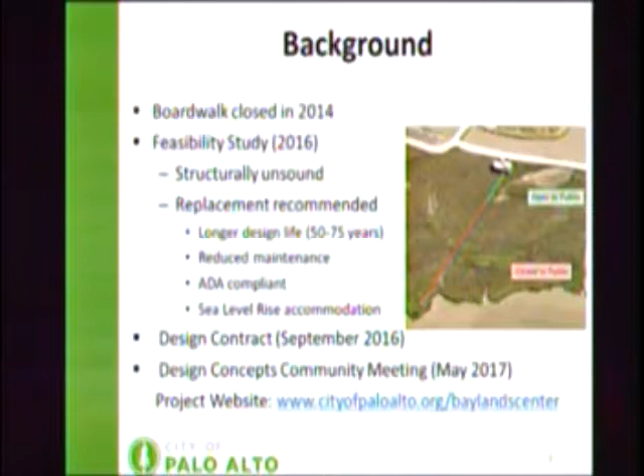We presented findings of the study to the Commission back in March 2016, and the Commission was in favor of replacement of the structure. A design contract was approved by Council with Biggs Cardosa in September 2016, and we developed initial design concepts and presented those in a community meeting in May this year.

The next slide shows an overview of the project. It includes all the project elements, which is essentially replacement of the existing boardwalk with a new boardwalk that follows the same alignment and has the same length. We will have some other components, including additional overlooks and an observation platform, new railing and decking, pylon supports, and some amenities. Tony is going to go over the details of the design.

So with that, I give it to Tony. Okay, so first slide, just talking about alignment, height, and width. We're going to replace it in the exact same alignment. The width of the structure, the existing structure, is 4 feet wide. We're going to widen it to 5 feet to better provide ADA access and passing lanes.

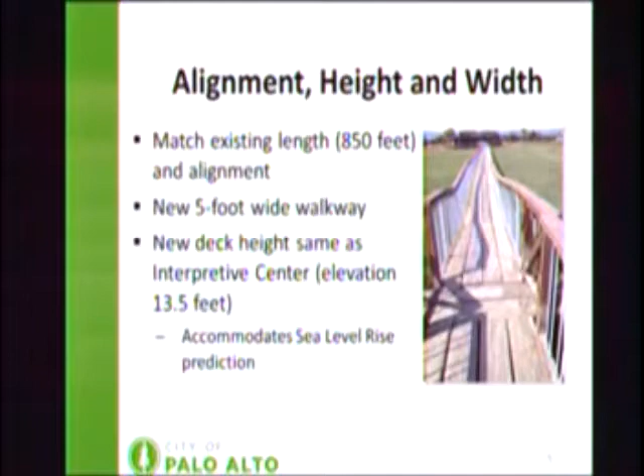One change since the previous presentation: the elevation of the deck has changed due to sea level rise conditions and our coordination with the BCDC and other regulatory agencies. They are interpreting the higher end of the curve, so they've raised our upper bound of where we can put the deck elevation, and we're proposing to match basically the deck elevation of the existing Nature Center at elevation 13.5.

How much of a change is that? That's about a 3-foot change, I think, from the existing 3.5. It's about elevation 10 now. Plus or minus, between 3.6 to 4.3 feet. The higher end is where the collapse of the existing boardwalk is, but the original constructed height was about elevation 9.9 or 10, so it's about 3.5 feet.

And the final overlook, or the viewing platform? At the end, we're just going to take it straight all the way out. Oh, that's unchanged? That would be unchanged, yeah. So instead of ramping down from the Nature Center out and then ramping up at the observation platform, you'd basically go straight out. Okay.

Another item that had changed since we previously presented: the original concept was to replace in-kind, with 2 overlooks and the observation platform out at the end. Per discussions internally with the public and with operations at the Nature Center, for seizing opportunities for more interaction with the Bayland site itself, we're proposing 4 overlooks strategically located to highlight different elements out on the site. Those can be seen on that one exhibit, showing where the 2 existing are and where the 4 are proposed.

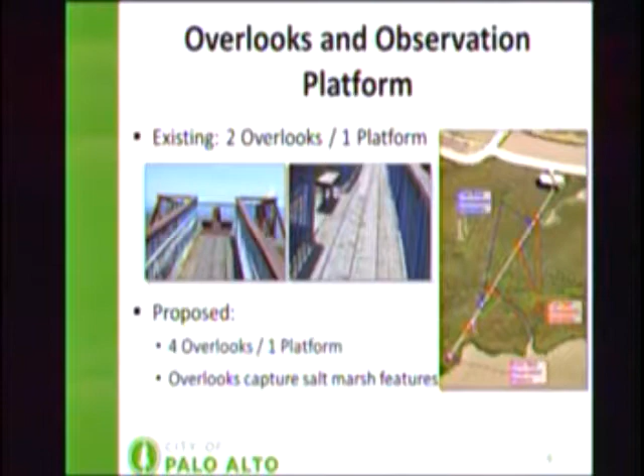The structure will have, we're proposing to use timber railing, similar in style to what was done on the interpretive center. The railings will be customized for use on the boardwalk. Since we have a very long linear structure with a lot of repetition, we're going to design the railings to be constructed in a panelized configuration, which will allow construction to proceed quicker, with less construction work on the site, and more work done off-site and carried on. The railings will be a minimum of 3.5 feet high to meet ADA criteria.

And then one element that we'll look for input from the commission on has to do with observation panels at the overlooks and the observation platform, to allow viewing through the railing. We have, on the interpretive center, glass panels there.

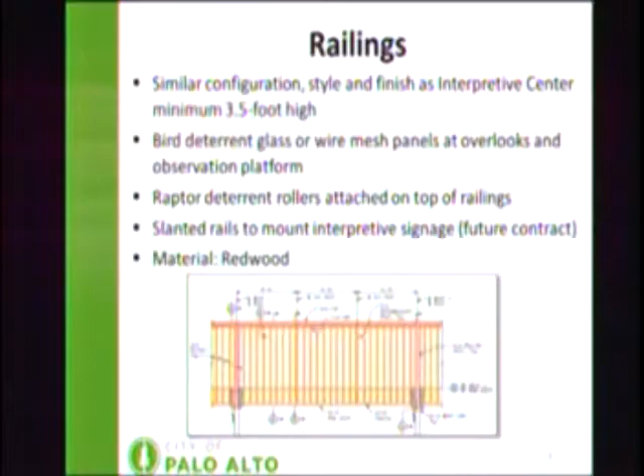For the boardwalk itself, in consultation with the biologists, we've shrunk the size of those openings to be a little smaller, less likely to cause a bird strike farther out where the birds are more active. We have two alternatives to look at: one's a glass panel like on the interpretive center, and there's also been some discussion about using a wire mesh panel.

Another change since we last spoke, which came out of our consultation with the biologists and coordination with the regulatory agencies, is a concern about the higher boardwalk elevation allowing raptors to perch on the higher railing, giving them an opportunity to hunt mice out there. So it's been proposed to put in what we're calling raptor deterrent rollers.

They're basically a roller system. If a bird lands on it, it rolls so they can't just sit and perch. There's a similar system in place at Alviso Park, and there's a photo up there of that system. Basically it's just a roller that sits along the top rail that would discourage raptors from perching there.

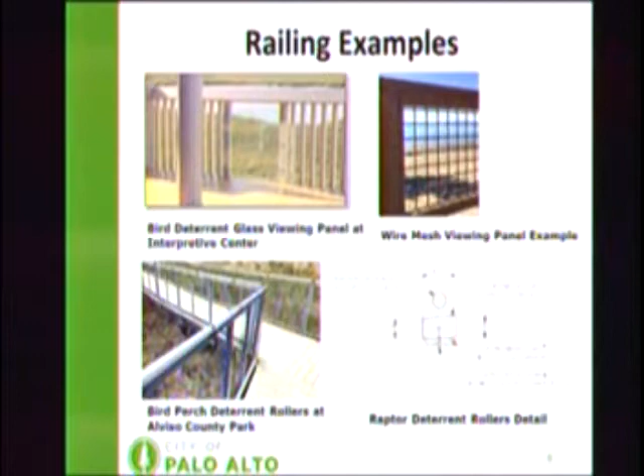Another key feature is the decking of the boardwalk. The existing boardwalk has longitudinal planks, with the boards running parallel to the direction of travel. The project proposes to use a transverse decking system, which is very common on many of the prefab bridge structures along the trails. The advantage is we get to use a smaller member because you have a shorter span, which helps with costs and with maintenance costs down the road, since you'd be replacing smaller elements. All of the decking elements we're looking at using redwood, similar to what was used for the interpretive center.

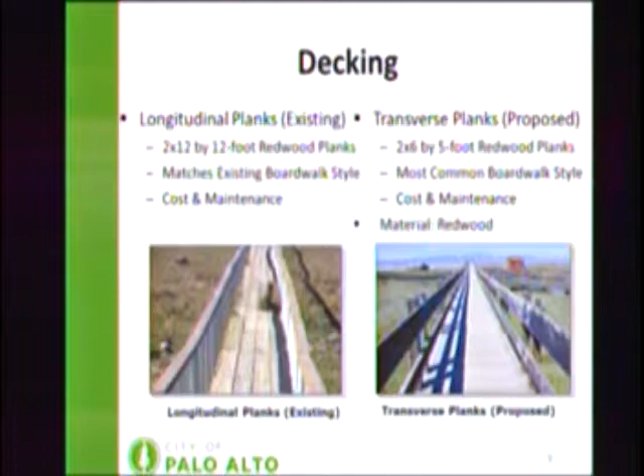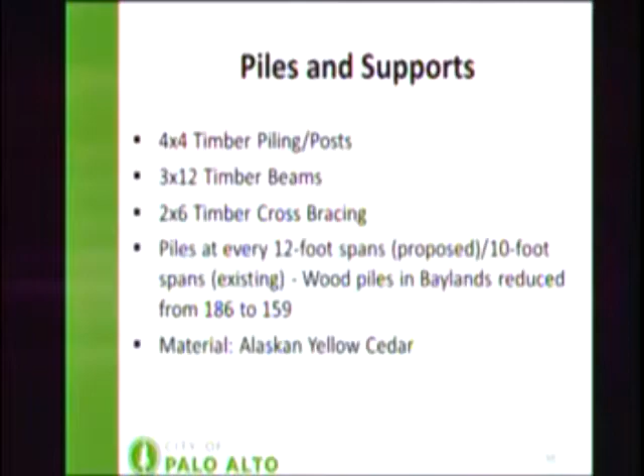The main structural elements consist of, very similar to the existing, timber posts or piling that go down into the bay muds of the marsh. They'll be capped with timber beams, and then we'll provide timber cross bracing to provide lateral stability to the system. Then there'll be longitudinal stringers that support the deck elements. All of these primary structural elements, we're proposing to use Alaskan yellow cedar, which is a natural, durable softwood, mostly coming from Alaska and areas in Canada.

That's an alternative to pressure-treated Doug fir, which the regulatory agencies have been strongly discouraging to avoid chemicals getting into the wetlands. That was a material already used on other projects and approved by them, and it was recommended by the Water Board for this project.

One of the options before was metal screws. When the structure got higher, the metal screws were no longer cost effective because they're very flexible, and the higher we got, the more sway you'd get out of the system. So we would have had to increase the number of elements in shorter spans, which is why we moved away from that.

As for what lifetime we expect for these posts, we're looking at 50 to 75 years as the target, in the mud. The Alaskan yellow cedar is a fairly durable material used in marine environments with salt water, and it's also resistant to marine borers, so it has good natural properties.

This graphic shows visually what the cross-section of the boardwalk would be. The elements in yellow-brown are the Alaskan yellow cedar, the primary structural elements below. Your walking surface, decking, and railing would use heart redwood, similar to what was used at the interpretive center.

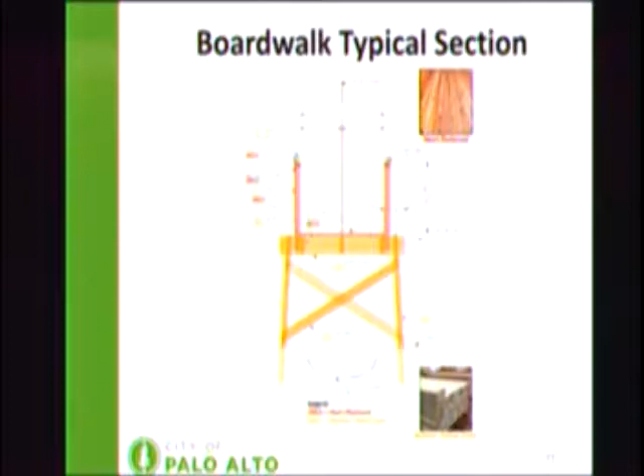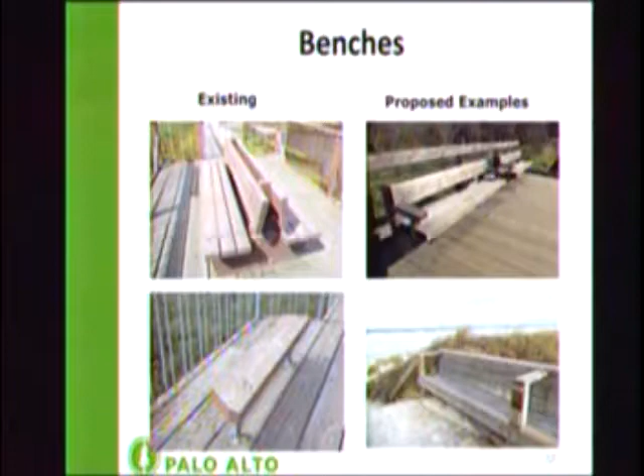In accordance with the site assessment and design guidelines for Palo Alto Baylands Nature Preserve, all the wood would be stained with a natural gray product from Olympic, and any metal fasteners and components would be painted Sandy Hook gray from Benjamin Moore, exactly as was done at the Nature Center.

With the follow-on project, there's an opportunity for interpretive signage to be incorporated into the project at the overlooks and the observation platform. Our design will accommodate some slanted railing that will incorporate the signage in the future, and we'll also design the elements to facilitate attachment of different interpretive features being developed separately by the city.

And the last thing for me, just a reminder of some of our key construction constraints that we're dealing with environmentally. Because of the Ridgway's Rail out there, we have a work window from September 1st to January 31st to stay out of their breeding season. So that's one of our key constraints.

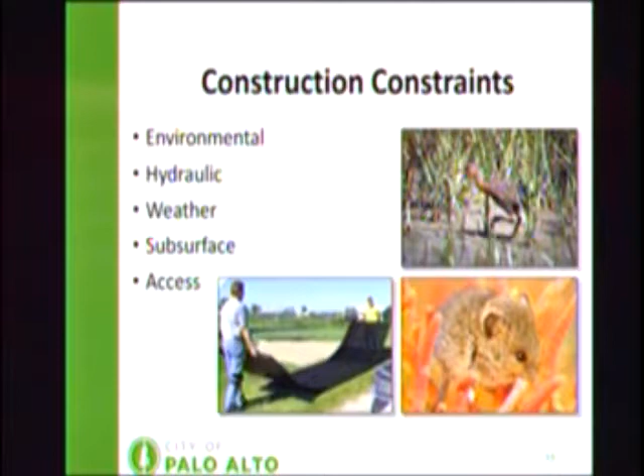Hydraulically, during that time period, we can expect a high tide usually once or more a month. So we're going to have to accommodate some flooding during the course of the project and some loss of work days. The construction window is in the rainy season, so we've factored in some rain days for our construction estimate.

Subsurface conditions, we're in a marsh with very weak soils, so that's accommodated in the design of the supports, as well as we don't really have a good ability to work from the marsh deck level itself. So we've proposed and designed the elements to be small enough to be constructed with small equipment from the boardwalk itself. The contractor, we would expect, may have to do some localized strengthening to support his operations of the existing structure before he removes it.

But the plan is to work from the existing boardwalk. The only caveat to that is access out to there. Instead of going through the nice newly renovated nature center, we need to come around the outside with a series of marsh mats on the marsh level to get access for the contractor on a daily basis.

And with that, I think Megha will take over schedule and next steps. Yeah, so regarding schedule, we have completed the preliminary design of the project, and we are currently preparing the CEQA document.

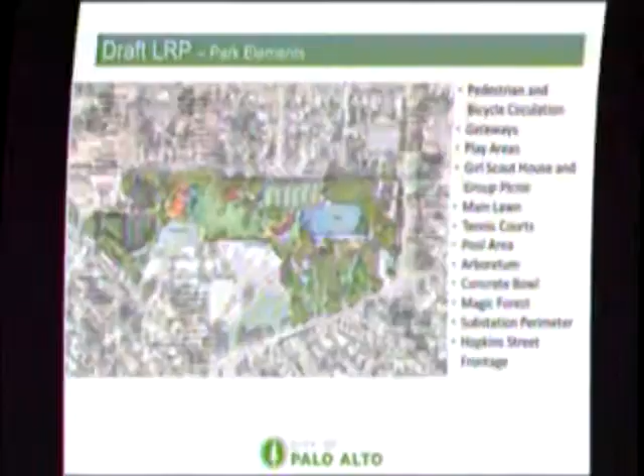The actual park, and how it's broken down into its pieces in the long-range plan, is known as the park elements. Those park elements that were really reviewed were the pedestrian and bicycle circulation, the gateways into the park, the playground areas, the area around the Girl Scout house, which is the location of the only group picnic area in Rinconada Park, the main lawn area, the tennis courts, the pool area, the part that runs along the street frontage along Embarcadero known as the Arboretum, because of the existing mature trees there, including a historic or heritage oak tree, number 2 for the city of Palo Alto, which is over a 200-year-old oak tree.

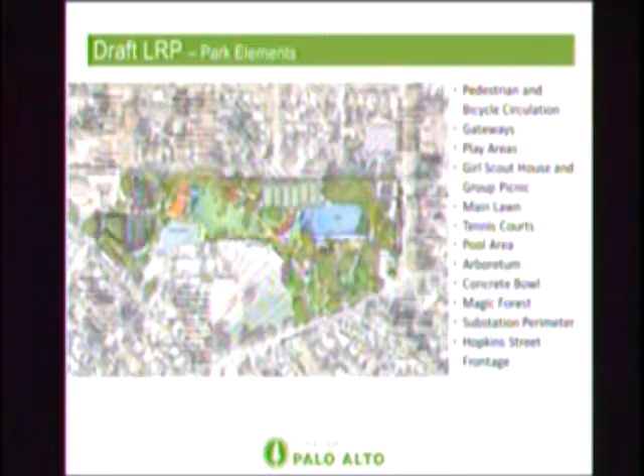The concrete bowl, the magic forest, the substation perimeter, and then the Hopkins street frontage. So if you had an opportunity to take a look at the long-range plan report, it broke down the park into these elements, and then discussed the recommendations for future either maintaining or improving those spaces.

It was very important - we looked at two different designs for the main pathway in the process of the master plan's development. One followed and went more towards the Hopkins side. It was felt by the commission, staff, and the community that the more direct link through the middle of the park, very similar to what it is now, would be the way to maintain that.

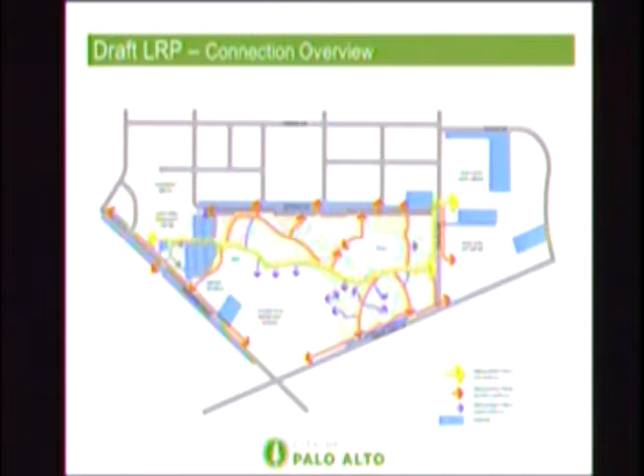It's interesting to note, as you've seen with the parks master plan process, this is a long range plan similar to that, though put together a few years ago. Over time things change and evolve, so the parking lot design shown in the plans isn't basically what's being proposed today—it's been tweaked due to the more intense design process for the Junior Museum and Zoo. So the plan's recommendations are something we can revisit over time. I think the majority are very good recommendations that don't impact the park much but add needed amenities. Like the master plan itself, this is an evolving document, not totally set in stone.

I'm going to go through about four slides here. Each one represents a different aspect of the recommendations for the park. This one covers existing park elements to be enhanced—things that currently exist in the park now, and the recommendations for how we can improve them slightly.

The first one is the open turf area. Basically that's about maintaining that space as it is now—it's a very important area of the park, used for large group gatherings. We'd like to maintain that, and improve the irrigation and drainage of the site to make it more usable and more sustainable.

The children's playground to the west, right behind the Girl Scout house, will remain in that location, with continued equipment upgrades and ADA upgrades as we do with playgrounds over time.

The multi-use concrete bowl will maintain its current form, adding some amenities like power, so it can be used more as a performance space—an opportunity it doesn't have now.

The arboretum area recommendation is to address removing the turf in those spaces to help mostly the existing oak trees that are there.

The tennis courts would see a slight shift to allow for a pathway—we'll talk about that pathway later. If you've walked through Rinconada Park, in that location you have to circumvent the well site and go through the magical forest to get to the pool, and that seems to be a popular path. We'd like to make that an actual real path that addresses some safety and access concerns at that point.

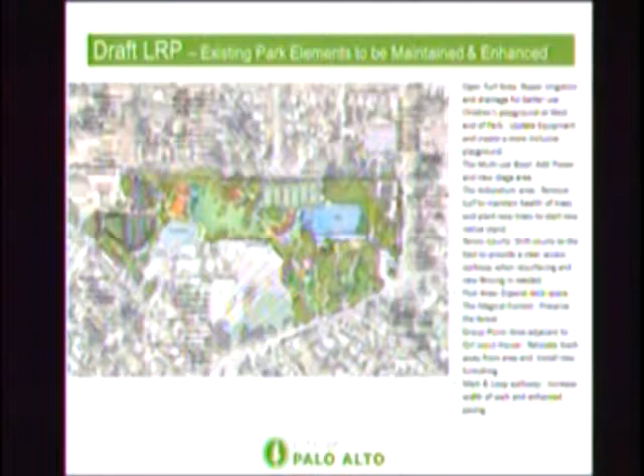The pool area itself would be maintained with an expanded deck. The long-range plan doesn't delve into a recommendation of expanding the pool itself—I think we all realize that's an option for the future if decided. What the long-range plan does do is expand the pool deck around the pool to provide the opportunity to have a full-size 50-meter pool installed there. So when we talk about implementation over the long range, we can discuss when we're planning to do that, and of course the cost of doing so.

The group picnic area adjacent to the Girl Scout house will remain, just enhanced with new tables and a new trash receptacle area to remove the dumpsters from that area.

The Girl Scout house location would remain the same, with some added amenities. We're proposing to add some type of fire pit area that would replicate the Boy Scout house fire pit area, to provide the same basic amenities to the Girl Scout house.

The main loop walkway would be maintained. We've heard from a lot of community members that the pathway around the main turf area is used for exercise, so we want to maintain that circular pathway and even have the opportunity to increase its distance.

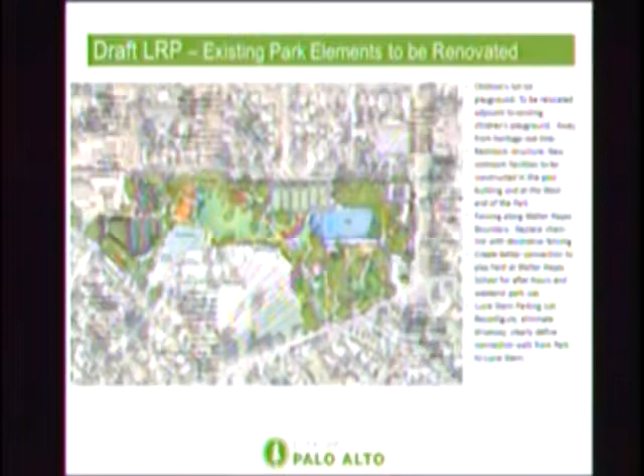These next items are existing elements in the park to be impacted more by improvements or renovations, including the children's tot lot. Currently that tot lot is closer to the tennis courts under an existing heritage oak tree—not the greatest location given the compaction and hard play happening under it. The plan proposes relocating that tot lot closer to the Girl Scout house, combining it with the existing children's playground there. The other reason for doing that is it allows caregivers the opportunity for their kids to play in one location without having to watch two separate areas.

Providing a new restroom structure. The current one in the middle of the park, we'd like to remove because it blocks a key view straight through the park connecting all the elements. That would be done by adding a new restroom facility onto the pool building. We'd have to have a new restroom structure anyway to meet current ADA standards, so moving that out of the line of sight would be beneficial.

The fencing around Walter Hayes School, enhancing that somewhat. Right now it's chain link and it takes up quite a bit of view out there, and it's not the most pleasant, so that could definitely be addressed.

Creating a better connection to the rear of Walter Hayes School. We heard a lot from the community that students from Walter Hayes come in through the backside, through the park, and there's not really a direct path to get to that gate, so we looked at doing that as well. And then the reconfiguration of the Lucy Stern Rinconada parking lot, which right now is hard to figure out and drive through—looking at renovating that to make it a better and safer experience.

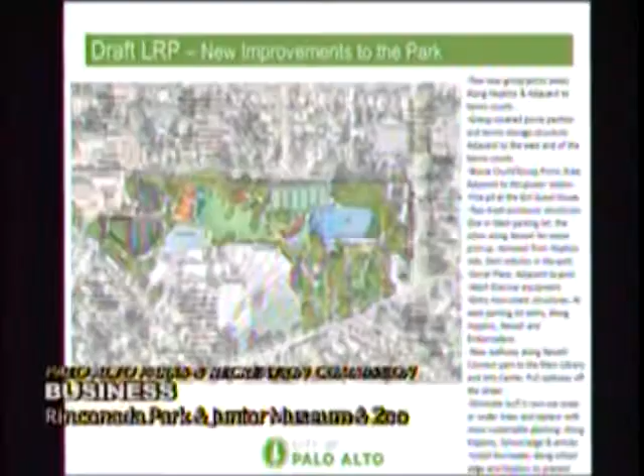This next slide discusses new improvements to the park that don't exist there now. That would be the addition of 2 new group picnic areas. As I mentioned before, Rinconada Park only has 1 designated group picnic area now. There's demand for more group picnic areas, so one location is behind the tennis courts, where there are picnic tables now—this would just be a more organized and larger group picnic area.

And then out along Hopkins on the west side of the tennis courts, that picnic area development is proposed, in the long-range plan, to have a covered picnic shelter. The Tennis Association has shown interest in developing and helping fund that structure. The local tennis group uses Rinconada as their main facility—they hold tournaments out there, and they don't really have a check-in or a place for their committee to meet. So along with funding that, they requested the structure have a room for storage and meetings, plus an outdoor area larger groups can use, which could also be used by the community when not needed for picnic purposes.

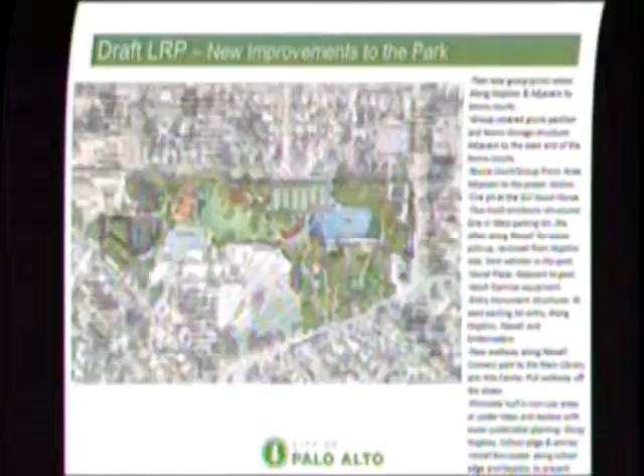The next one calls out for bocce courts. Where would this new building be? It's right next to the tennis courts, right here. That's where the tot lot is right now. The tot lot is more underneath the oak tree, but yes, right adjacent to it, basically.

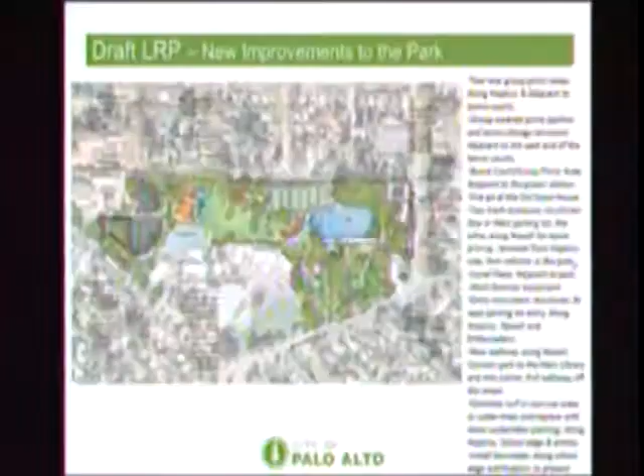The bocce courts and the group picnic area are in the area between the pool and the power substation. The plan recommends activating that area and providing some type of usable activity in that space. Bocce is an option—I think when we get closer to developing that space, and when it's on the books as a CIP project, we'll have further discussions about what that space is actually going to be developed as.

We want to add 2 trash enclosures. If you've been through the park, you'll see the dumpsters are just kind of scattered around. We want to make a specific, more concealed place for them, where trucks coming to pick them up can more easily access than where they are now.

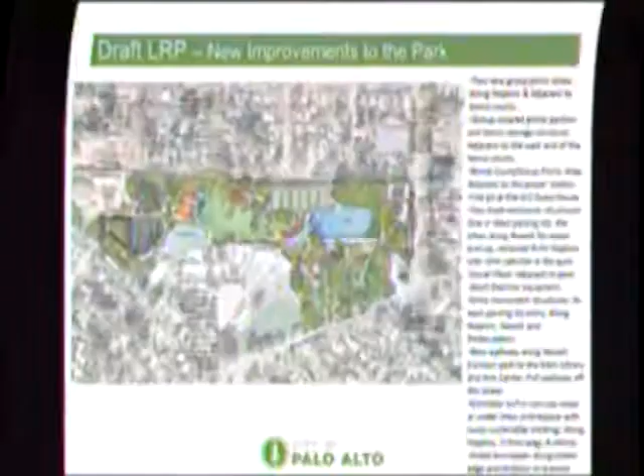Developing a better plaza outside the pool area, providing adult exercise equipment in the park associated with the playgrounds, and providing entry monuments at the entries—mostly at the entry from the Rinconada parking lot, and from the Newell Street entry. The idea is to use art or some type of structure or architecture there to highlight those main entries, so from the parking lot or from across the street at the library and art center on the Newell side, you would clearly see the entryway to the main pathway leading through the park.

Developing a new walkway along Newell, along the power substation. Currently along Newell there's a row of redwood trees planted underneath the high voltage lines. They are continuously topped every few years because they can't grow into the high voltage lines. Unfortunately, the redwood tree is known for its height and columnar form, but that's not the case anymore—that continuous cutting will eventually lead to the tree's demise.

So what we would like to do there is actually remove the redwood trees from that location, pull the walkway off the back of the curb and get it more towards the middle of the space, have it more meandering, much more of a nicer pedestrian walk that's leading you from the corner to the main walkway, and then replacing the tree planting with a more appropriate size of power line-native trees.

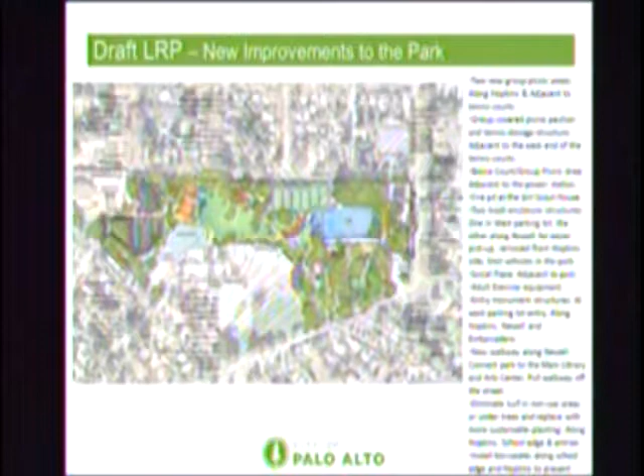So where are those trees on the map? That area would be right along here, right along Newell. Basically, if you're standing at the Art Center Library and looking right here, you're looking right at that row of trees there.

And of course, for sustainability purposes, we'd like to address removing some of the turf area that's out there, especially in spaces where it's not really usable on the edges, and also capturing and filtering stormwater on site. We have an opportunity to do that as well.

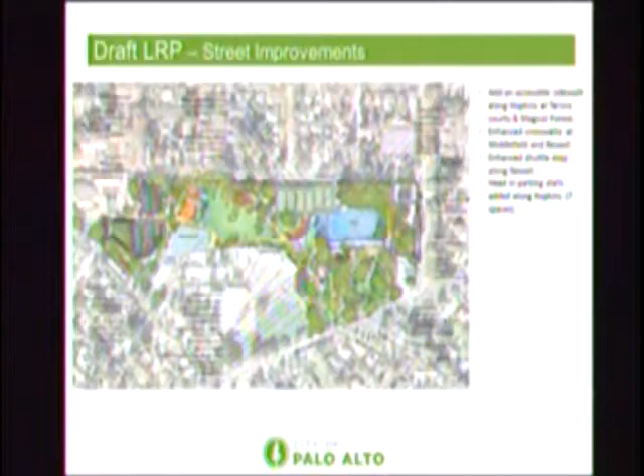The last slide for improvements here are the recommended street improvements around Rinconada Park. Most of these have actually already started to occur. We started to do this back in 2012 and 2013. You'll see a project right now going on Middlefield at the Lucy Stern Center that's adding an enhanced crosswalk there. That was one of the recommendations of the long-range plan. A few years ago, an enhanced crosswalk was installed on Newell between the Art Center and the park itself.

We'd like to also add an enhanced shuttle stop along Newell. There's one there now, it's just basically a park bench, but we talked about covering it or making it more special somehow in that location.

And if you've been to the park, there's head-in parking that runs along Hopkins. There is a location now, towards the west if you move towards Lucy Stern, where that parking could be expanded to give a few more parking spaces that would help address some of the tennis and pool users, giving them a little more flexibility to use those facilities.

The next few slides show the ideas behind implementation. The long-range plan itself is set up to be developed over a 25-year period. That's mostly based on economics and getting all the money necessary to renovate the park. You're basically looking at doing a project there every 3 to 5 years to fulfill the long-range plan.

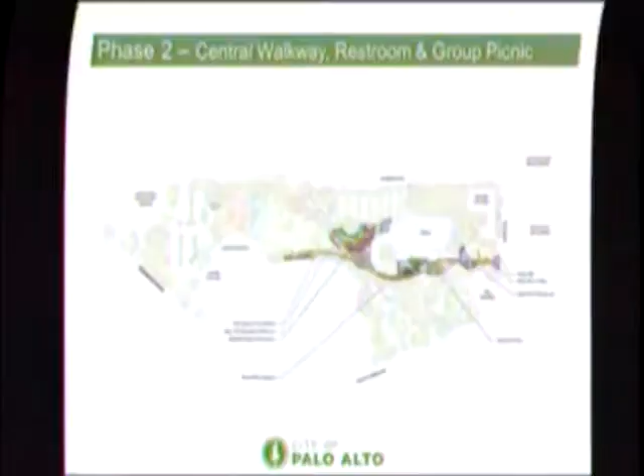Then we'd like to finish enhancing the pathway that runs through the park itself, since that is one of the main objectives of the long-range plan. That would focus on phase 2, which would look at the development of the space in front of the pool, as well as the development of the second group picnic area.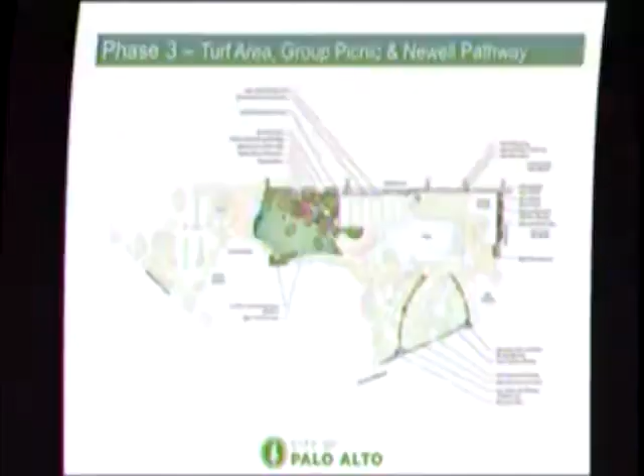Completing the connection of the walkway along Hopkins, that I guess is a two-phase thing. Currently, there is no sidewalk along the Magical Forest section, which is this section right here. It has a decomposed granite pathway. We'd like to connect the concrete path from there to there, so it's continuous.

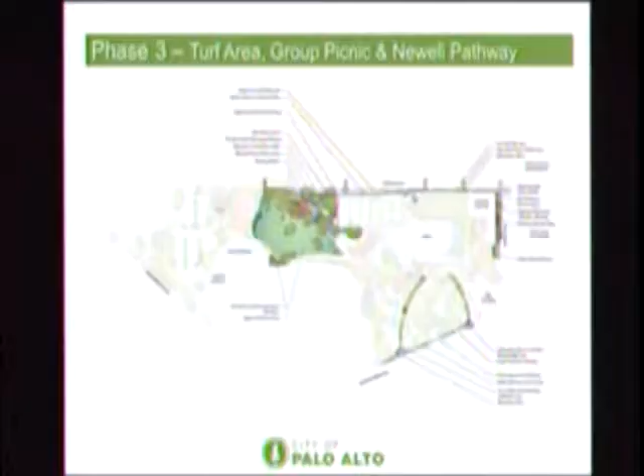There also is not a concrete path between the parking area and the tennis courts. There is ample room though to create a walkway there, so we'd like to continue the walkway in front of the tennis courts as well, hooking up to the sidewalk on the other side to enhance that whole edge and the connection to it.

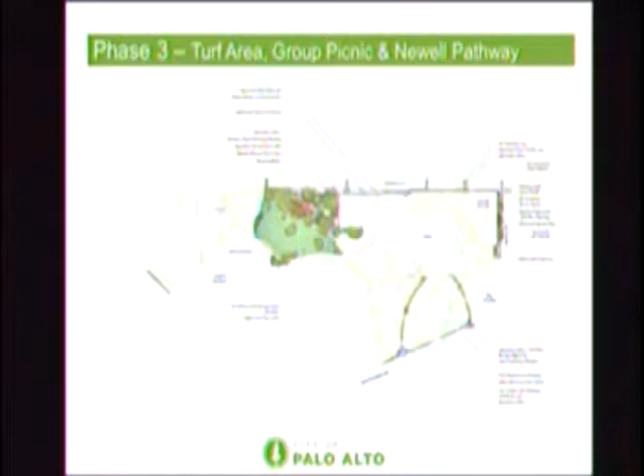It also looks at pathway improvements to the Arboretum and upgrading those paths there, as well as the secondary entries along Embarcadero, to give the park more of a statement so you can notice it and see the entryways from Embarcadero as you're driving by.

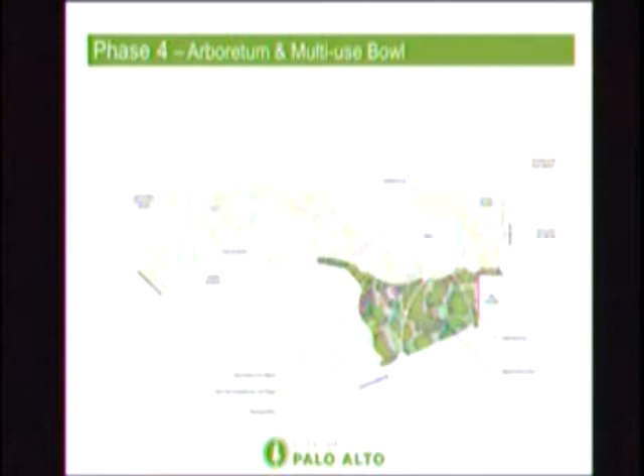The fourth phase is the development of the Arboretum, which again, there's not a lot of development there. It's mostly the renovation and removal of turf to enhance the trees, and then the minor renovations for the concrete bowl.

The fifth phase is looking then at the magical forest, and developing the area between the pool and the power substation that's there.

The sixth phase, and it's put further down the line, creating a pathway basically in this location that currently ad hocly exists there now, but we'd like to make a real pathway.

In the scheme of the tennis courts themselves, the paving will need to be replaced at that point, and when it does, then we'll basically shift the whole tennis court area over 15 feet, but that is not really required here for the next 10 to 15 years time frame. So we're going to allow that transition to play itself out naturally.

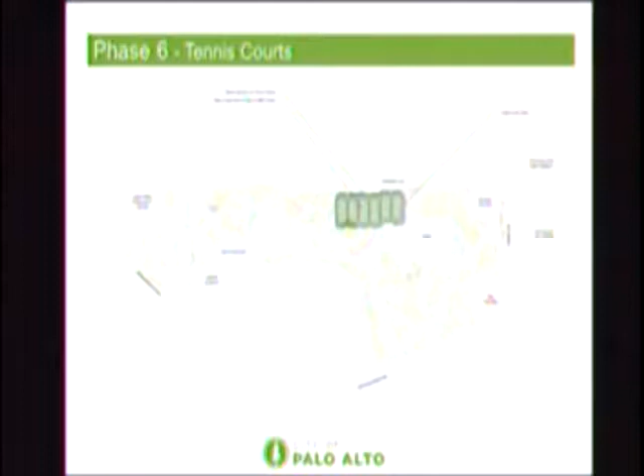And then, of course, the final phase of this is the swimming pool area. You can see basically what's happening here is the development of the expanded pool building with a restroom facility inside. There's also been some talk to have a multi-purpose room in there that could be used for classes.

A lot of classes happen at Lucy Stern. It's a beautiful building, but I don't think it was intended to be a gymnasium. So it would be nice to have another space for small-scale classes to have a location in.

And as well as you see the actual pushing out then here of the pool deck area, that would then allow the pool to be expanded to a larger size in the future.

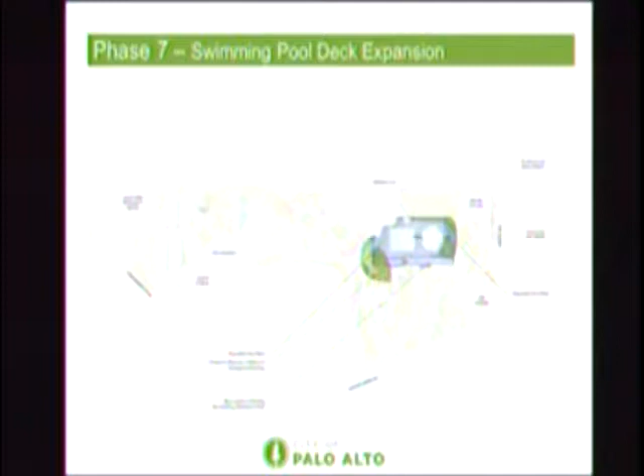So we're here tonight to basically represent the long-range plan to the commission, since most of the new members have not seen the project at all. We will be coming back at some point when the CEQA aspect is done, and I would say that that is currently going on now.

It's a 30-day review period we're in the middle of. It ends on September 5th. If you have any comments per that environmental study, again, it's for the long-range plan and the Junior Museum and Zoo. September 5th is the deadline or cutoff for comments on that environmental study.

I will get more in detail on the findings of that study in a second. And then, of course, we'll take the actual long-range plan and the environmental study to council for adoption. I'm hoping that happens at the end of this year, that we can do that.

And then phase 1 construction is predicated on the construction of the JMZ, or the Junior Museum and Zoo, which I think we're currently looking at around the summer of 2019. So whenever that takes place is basically when that first phase will kick off and be done. It'll again focus on the parking lot itself and then that west end of the park.

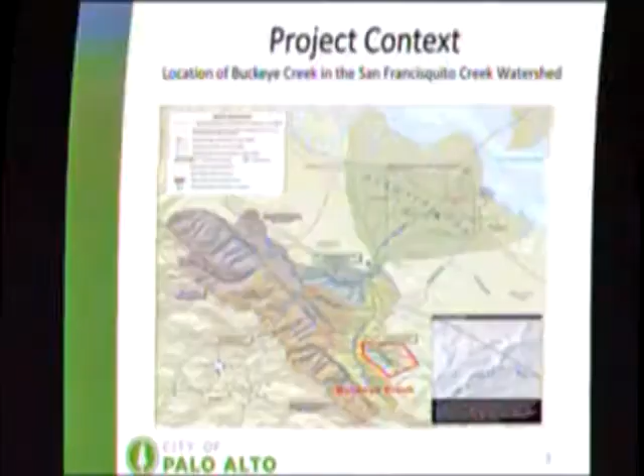So after the March 28th commission meeting, staff and the consultant further developed the creek improvement concepts and shared them at a community meeting on June 12th. Although there were only 4 participants at the public meeting, there was unanimous support for the recommendations to solve the creek's erosion problem. But acknowledging the fact that we got such little turnout, we decided to make poster-sized display boards of our proposals and post them at the park.

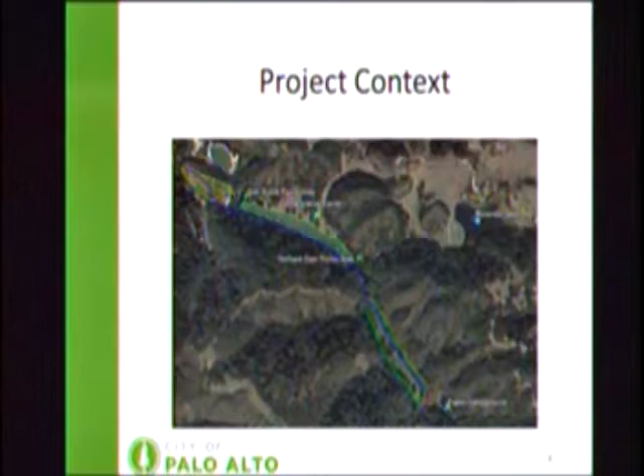We did it in 3 areas: Wildhorse Valley, Las Trampas, and the 7.7 acres, and inside the interpretive center. Rangers would talk to people, and they could also leave notes as they came up to this. We got about 10 notes of feedback, which was all generally positive, and I'll go over a couple of the ideas so you have a sense of what some of the park visitors are thinking. A lot of the people we've been speaking to about this project have been environmentalists, and they're very focused on creek and habitat improvements.

We wanted to make sure we're reaching out to other constituents of Foothills Park as well, so this was an endeavor to do so. Some of the comments kind of reflect that.

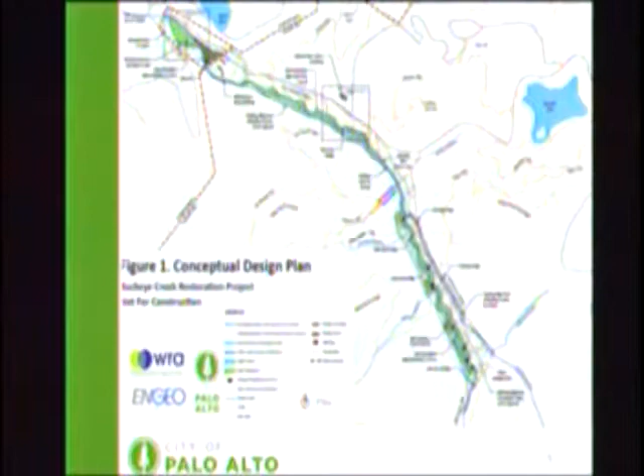Some good suggestions saying please consider adding benches and campsites along the new creek sections, if possible. I assume they mean up by the Wild Horse Valley section. Others commented that they love the idea and would love to see a beautiful, healthy creek. They're all for making the place look better, and we should do whatever it takes to do it.

Some people said, I think you should be better off spending your money to fix those closed trails before you improve the creek. And just as a side note, that's something we are working on now, and it would be different dollars, so they're not competing.

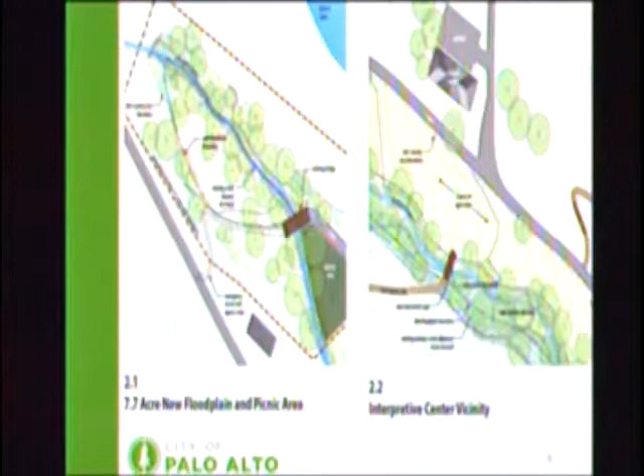Another person wrote, creek restoration is a fantastic idea. I think it'll be much more diverse and interesting and allow the full enjoyment of the creek. A last one I'll mention was a little bit different. It said, after shifting the channel, wait to do any planting until the creek has run its course and let nature dictate what comes next.

So using that feedback, the feedback from all our community meetings, the stakeholders, the commission, our ad hoc, and our park visitors, the consultant developed our preferred alternative design. While there are other options that we should definitely look at and consider, and I'll go over them today, and they were in the report as well, the focus of the draft report is that preferred alternative. I'm going to break down the 3 core sections of this preferred alternative in order of priority.

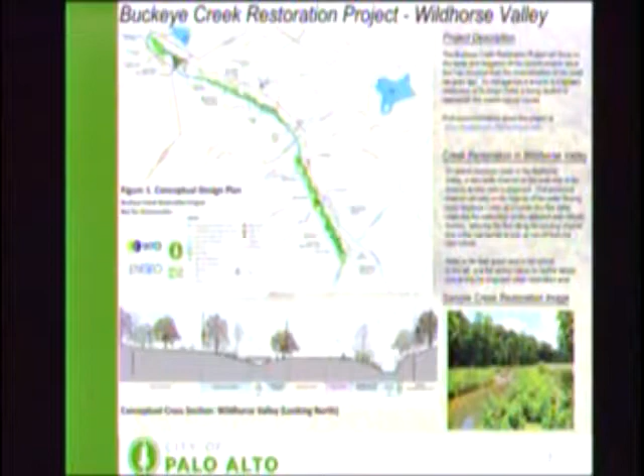The first is the Wild Horse Valley section. I'll ask my partner Kurt here to use the mouse, if you can, and highlight different areas.

This is an area where we create a new section of creek in what is currently that grass meadow, Wild Horse Valley, and it would meander through this area that is most likely the historic floodplain. So it's really putting the creek back where it was originally intended to be, kind of where it wants to be, because right now it's being choked off in what's really a glorified drainage ditch. It's deeply channelized, and we've talked about the challenges the creek has and how it's been constrained and pushed off to the side.

This would create approximately 2,600 linear feet of new creek channel and about 5.5 acres of new floodplain. I want to clarify, this would result in 2 creek channels on each side of the Wild Horse Valley. There's the existing one that would remain, and then this new one on the other side. They'll merge together, and Kurt will point this out on the map, in Wild Horse Valley, just above Orchard Glen picnic area, if that makes sense.

So right now it goes under the road, there's a bridge that goes under that road. It would use that same bridge? Yes, the existing channel will remain in that portion. That's correct. The second section I want to tell you about, also part of the preferred alternative, is in the lower reach, in the Las Trampas Valley.

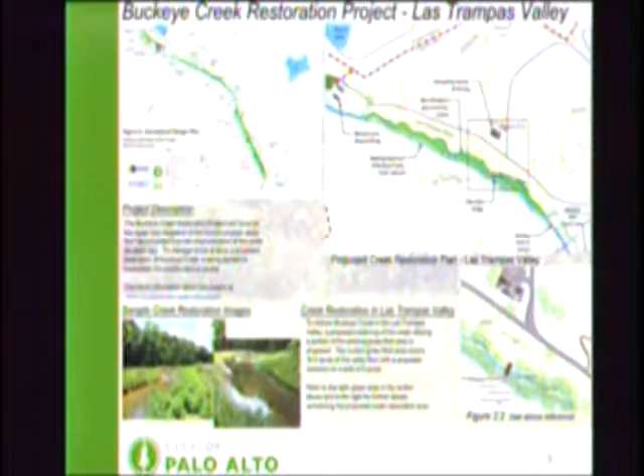In this area, it would create approximately 3 acres of floodplain by removing the soil material in that existing grass field. This is the manicured, mowed grass area across from the interpretive center, and much of that is fill material. Again, that was most likely, from all indications, historic floodplain, where that grass is, and where we would recommend taking about half of that grass area. It would weave and meander and become this new floodplain, closer to the historic alignment.

I should point out, we had some questions I just want to clarify. There's an existing channel there, and again it's deeply channelized. To add a little clarity on what would happen as we excavate the soil out towards the center of the turf, that deeply channelized area would be filled with soil from our project, and it would just have a nice, easy grade up towards the center of the turf.

The last section of our preferred alternative is the 7.7 acre area. Much like the Las Trampas Valley section, this would be widening the section of the creek. It would take about 2/3 of the flat area adjacent to the creek there, and it would bubble out. There'd still be enough room for a pathway on the exterior of that portion if we chose, or you could even put a pathway inside that floodplain, because it's not going to be full of water most often.

We just have to be with the understanding that whatever trail or amenity was in that floodplain area, it'd be surrounded by native plants and vegetation, and the kind of trail that would need a little more maintenance, or it'd be a simple, more meandering style of trail, if we chose to do that. And that improvement on the 7.7 acre area would result in a 1.2 acre floodplain.

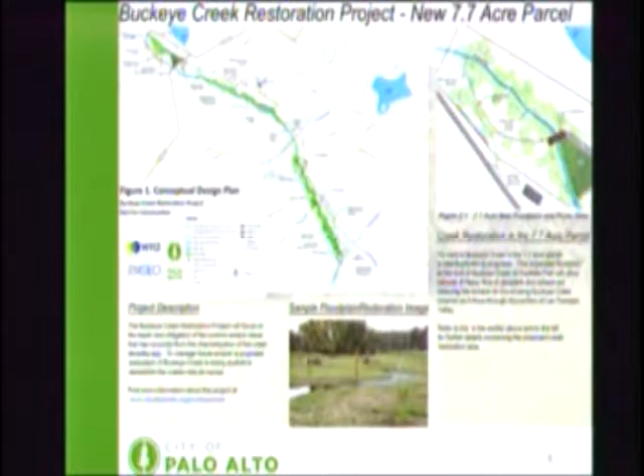So the preferred alternative would retrofit existing grade control structures. We've got these grade control structures, you might remember there are rock gabions, the metal-enclosed rock areas that are in a number of areas along the creek, mostly in the Wild Horse Valley section, and also wooden gabions as grade control structures. Their intent, they were put in the 70s and 80s, was to slow down this water and help address the erosion problem, and they're at the end of their useful life.

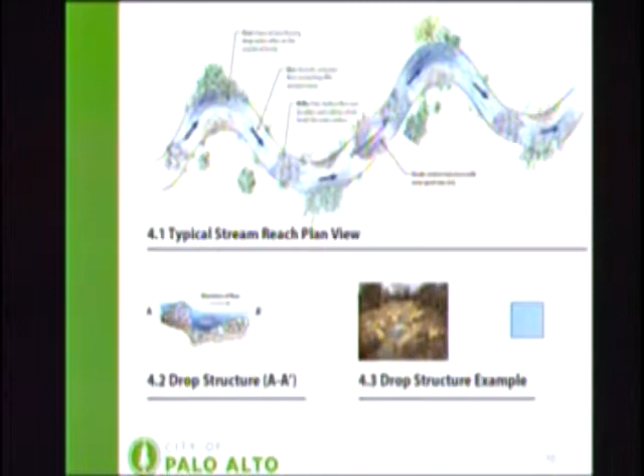So it's important to note, and I'll get back to that in a moment when we talk about alternative choices instead of the preferred, that would be part of the preferred one, is we'd have to do that. The cost of this preferred alternative, including design, permitting, environmental review, and construction, is approximately $9.7 million, and it would take approximately 5 years to complete all those portions that I just mentioned.

The draft report does include that detailed, itemized cost estimate for the preferred alternative, and it recommends that we do the entire project and fund it at once due to the severe condition of most of the portions of the channel and the complex permitting process associated with creek restoration.

Let's look at the alternative options, and this is in the staff report and in the body of the draft report. But I also want to go over these because these are important when we're talking about a $9.7 million project. One option the city could choose is to do nothing, which is what we've done for the last 40 years or so since the last grade control structures were put in. I just want to explain what that means.

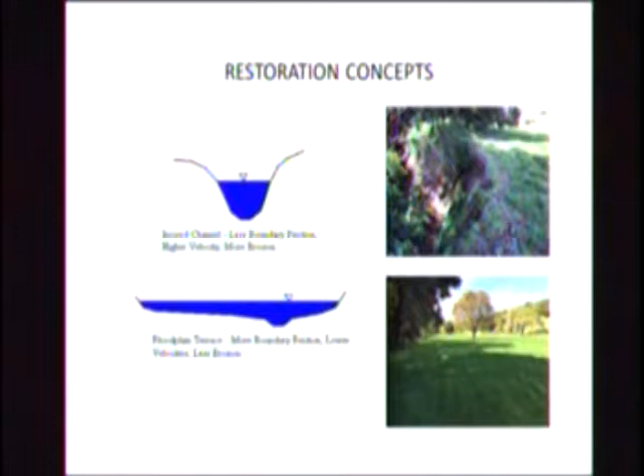So the idea is it wouldn't cost us anything, but that's not quite true. Those grade control structures, I said, are at the end of their useful life, so in about 5 to 10 years they're going to fail. They'll fall apart, additional portions of the creek will collapse. The pedestrian bridge that goes across to Los Trancos Trail, in front of the Interpretive Center, that bridge will collapse - there's not a lot of support on either end right now. So if we have additional erosion, it's not long before that fails. 5 to 10 years, I think, is a realistic expectation for that.

And when that happens, we're talking about vastly increased erosion, vast amounts of sediment sent downstream, big impacts to the environment, and necessitating putting in some structure to protect, most critically but not solely, the utility corridor in Wild Horse Valley. We've talked before about this utility corridor where we've got water lines, sewer, electric, fiber, phone, all hugging the very edge of that levee, the creek edge, all through that section. So if the grade control structures fail, then you're putting that infrastructure at risk.

So we'd have to come in and do something. It's really not a no-action option, it's really a deferred option with expedited and increased cost if we were to wait 5 years and do it after the fact. There's also the risk that when we come time to do this no-action thing and they fail, that the regulatory agencies say we're not going to let you only fix the grade control structures, we're going to require you to do more. That's a very, very real possibility that could happen.